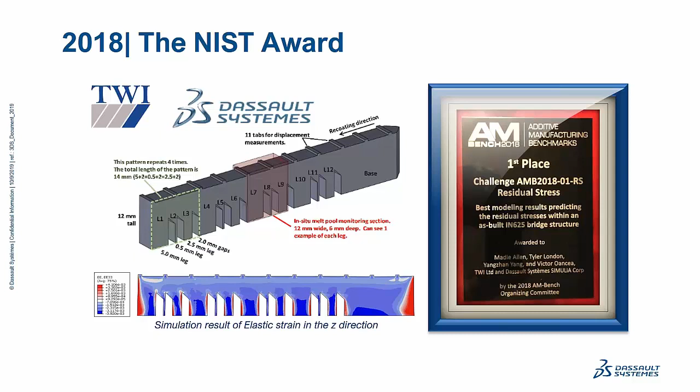But there's actually more in the pipeline, because in 2019 - that's one part of the whole additive manufacturing puzzle - we were also very proud to be the winning team in the 2019 Sandia Labs Challenge. This is what they term the Topology Optimization Roundtable Challenge. And basically the challenge was to use topology optimization in the design of a component for a Formula One race car, and whoever came up with the most effective design would be declared the winner.

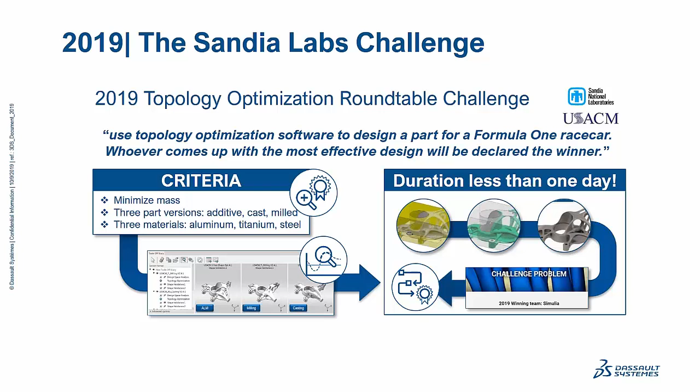Now this was based on a couple of criteria: you had to minimize the mass and make 3 different part versions - additive, cast, milled - and use 3 different materials, so aluminum, titanium, and steel. And basically, if we boil it down to a single thing, the fact that the duration using our solution was less than 1 day was, I would say, the chief convincing factor for the committee. So very happy to kick this off with 2 awards to the solution.

Now, it's always fun to talk about history. I did this in the last webinar when Stephen and I were talking about the eigenstrain method. I'm not going to dwell too long on this, but what I want to say is that we have been doing additive manufacturing for longer than a lot of people really think. Because this first started back in 2014 with the very first AM simulation that was based on Abaqus model change technology. And we honed this back and forth until in 2017, we released the first version of the end-to-end additive manufacturing solution, which we also refer to as Print to Perform, which you have probably noticed in both social media and our webinars earlier this year.

And what I would just like to say is that as of this year and moving forward, we are focusing on increasing the customization, because effectively you can say that every 3 or 4, maybe 5 months, there is a new additive manufacturing process coming out. And there's no way that anyone can keep up providing ready-to-go templates for these. It's simply not possible. So what we are doing is increasing the customization capabilities to be able to cover really any process. This is where we focus on simulation ecosystem integration, or in simple language, getting more input and getting even closer to our users who have started to adopt and are coming back with valuable feedback on what it is that we do for additive manufacturing.

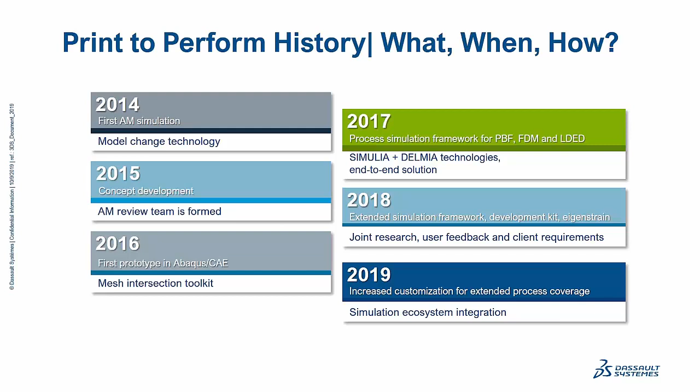So I did say that we have something which we call a fully fledged solution, and this is what we mean when we say full coverage. We actually speak about not just being able to go in and do a couple of local parts for additive manufacturing, but all the way from design up until the actual validation - let's say durability or a static fracture case - to actually putting a successful part out at the end of this chain. That's basically what we propose. And this is no dream, this is not a vision. It's just something we can offer with technology that's already been vetted, validated, battle-proven.

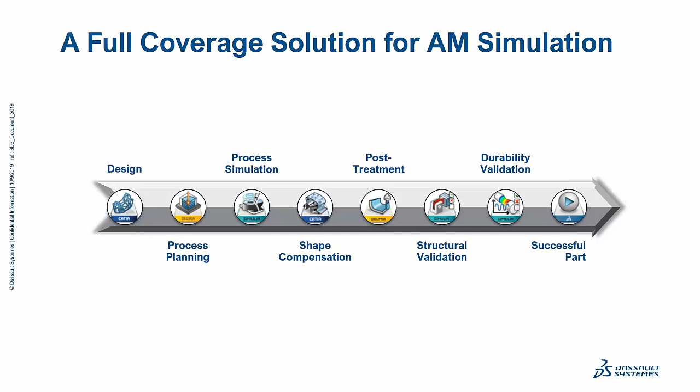If you have used any of our standalone or any of our legacy technologies in the past, you will know that this is nothing to be contested. But we're going to be talking about this more in detail, specifically on the thermomechanical bits, so I will simply move on to talking a little bit about challenges.

The fact is, when you want to go from having powder in your hand that is going into the 3D printing machine to actually getting working parts out in the end, there are two ends, or two players on a big field, you might say. There is essentially the team design and there's the team field. And design are basically those people who dream up all the new and interesting and organic and fun geometries, and they're being presented with a lot of challenges, which they solve in the best way possible with the tools available to them.

But the same goes for the people in the field who effectively have to more or less take the stuff that is being made for a test drive and tell the design team whether or not it actually works. Now, the classical way of doing this is by using the silo approach, you might say. And the problem is that getting something from a concept stage to an actual prototype is a process of going from weeks to months. It can take a tremendously long time because we're shifting information in a very inefficient way.

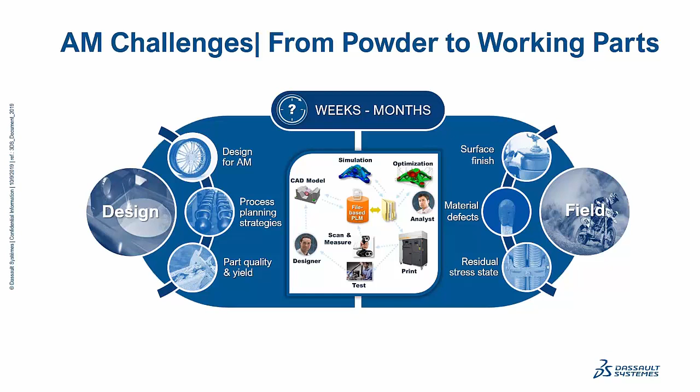So the question is really, if we want to reduce this, and that's what we have to do because it's an old technique, additive manufacturing, but it's a novel piece of technology. We want to change this so that we're not talking weeks to months, but rather days to weeks. When you say, okay, that's a good idea, generally this is the situation you're going to be faced with: a lot of concerned, frustrated, and simply confused faces in your workforce. So the question is, how do you bring the skepticism or the discrepancies of these two teams together and make it dynamic, make it completely collaborative?

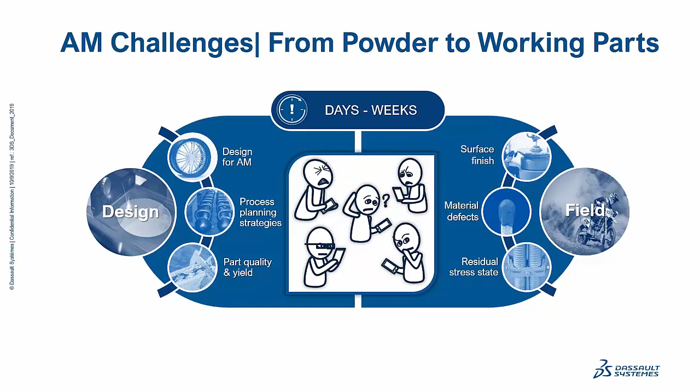This is where we bring in what we call the end-to-end solution for additive manufacturing simulation. And effectively, this is based on 4 different components or 4 different pillars. It begins with the so-called function-driven generative designer. You will see some bits of that today, but not much because our focus is on a different topic. The second part is where you go through the step of actually preparing whatever it is that is supposed to be built in the additive manufacturing programmer step. The third, and that's where we're going to be focusing our activity today, is the additive manufacturing researcher, which goes into deep simulation, tries to deeply and in a very detailed fashion understand exactly what goes on in the printing process.

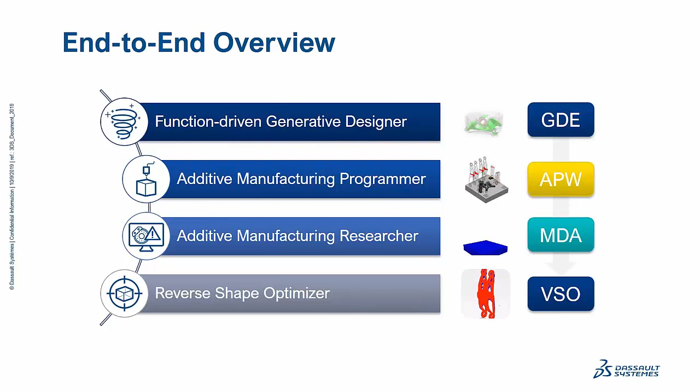And to close everything off, well, you can consider it a small component, but it is certainly not an irrelevant component, and that's the reverse shape optimizer. This is the tool that can be used to close the gap between the as designed and the as built component. So it's absolutely crucial. We will touch upon it in a little bit, but not in detail. So with fair warning in place, I would like to proceed to the next section, which is simply to talk a little bit about the print to perform features.

Now, I have deliberately gone through the introduction a little bit quickly. If you have any questions about it, please save them until the end. And I'm now going to pass on to Stephen, who is going to take you through a couple of steps and then go into exquisite detail.

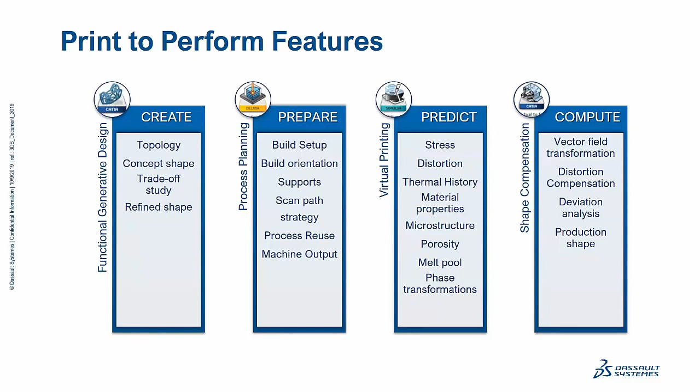Let's have a look at some of the details we've been talking about. So, of the 4 pillars we talked about, the first is the design pillar, and that's something that I would almost call a known concept, the role in which you have the functional generative designer, which allows you to design parts in a new and novel way. It's commonly called bionic design, or the technology is topology optimization, which will give us designs which may or may not be printable using additive manufacturing. And at this stage, we have the design created as we have it here.

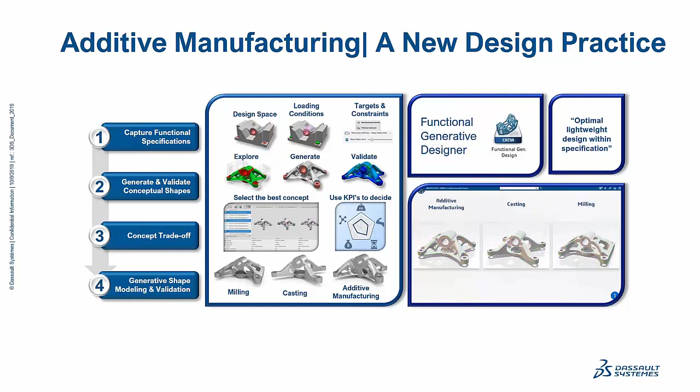So the next step would be to look at manufacturing the product. So we're staying in the same environment, now shifting the app to the process planning, preparation. The design exists, and now we are looking at things like arranging the parts in the build tray where they should be, deciding which machine to use for printing, and since we are using a laser additive process here, we decide which kind of scan path, what laser power, what laser path we want to use. That is part of the process planning and preparation.

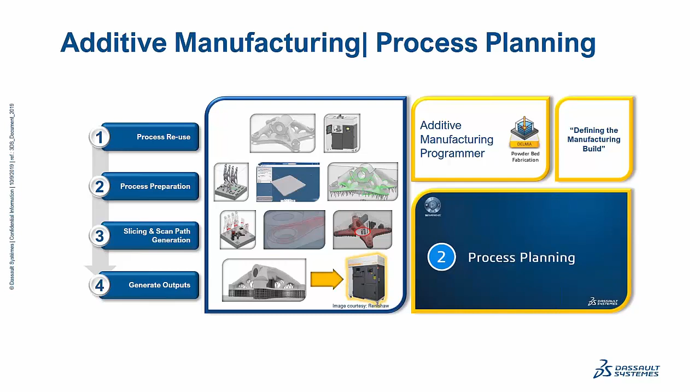With the information in place, with the support structures generated and everything, we are ready to print the part, or, and that's something that I think is very important, to simulate printing of the machine. So the concept that we're using here is pretty much similar to the paper printer you may have in your office. When you buy a new printer to print your reports, you normally run a setup configuration on your computer so that your computer knows how to talk to the printer. You run a printer installation from disk or a floppy back in the days, whatever. And the same concept applies to what we call the virtual machine.

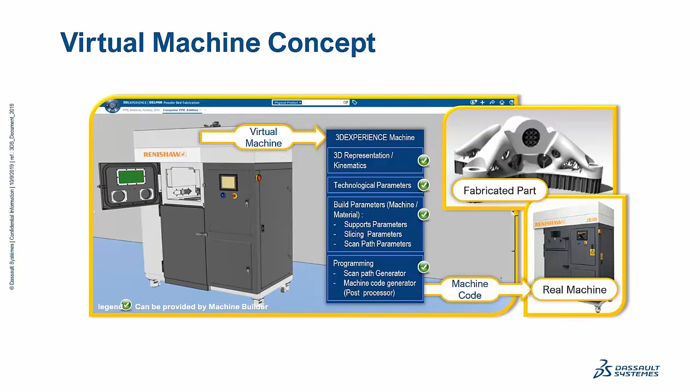So within our software, we have a virtual representation of your physical printer, like this Renishaw machine shown here as an example, with all the kinematics, the technology parameters, the build parameters that are available in the machine, and you're able to program that machine online using our software and send that information in machine code right to your physical printer. And I think that's the important thing when we talk about digital continuity, we use exactly the same information to actually print the part in the simulation. So for example, shown here, for a rather complicated structure like this lattice, we generate the print path, the laser scan path, and we use that information as an input for our thermomechanical simulation.

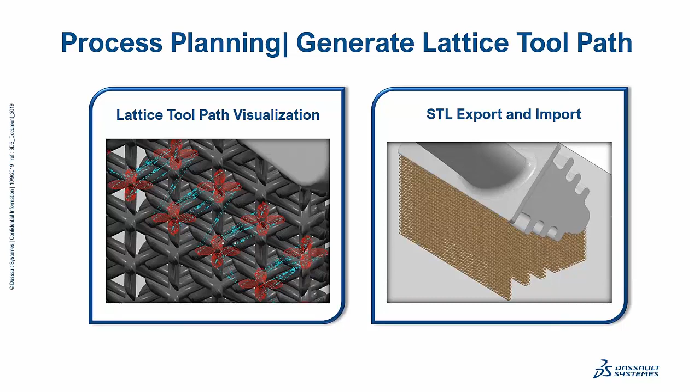So let's have a look at this simulation. That's the virtual printing process that we're looking at here. So in this virtual printing process, what we want to do is incorporate the information from the print setup. We have the geometry, we know the material data, thermomechanical material data that is, of course. And what we do is a two-stage simulation. The first stage is the pure thermal simulation. We take into account the laser path that we just derived, put that information in our simulation, and see how the temperature field evolves over time. With this information, we can run the structural simulation, which will give us predictive information about the possible part deformation, about stresses, and things maybe not going as we want them to in the print process.

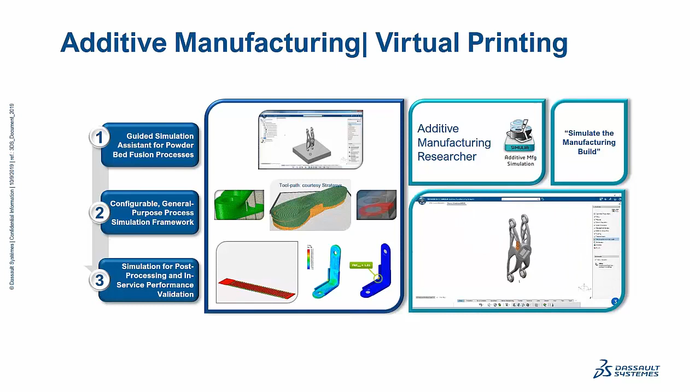How does that work? At this point, I want to go into some of the technology details that we have created, making the whole simulation possible. Oftentimes, when we present our thermomechanical approach, we are met with skepticism. People tell us, oh, this is going to take light years, or ages, or eons. It's technically impossible because they assume we are forced to use elements at a micrometer level size and simulations that take forever. Now, we wouldn't present our technology if that was the case, if it would take all the computers that we have available on Earth. So we have two tools that allow us to do this thermomechanical simulation in very competitive time, giving very good results, as Anders already said, with the examples from the NIST award and the other awards that we got for this simulation.

The first thing that we have here is the Mesh Intersection Toolkit. This Mesh Intersection Toolkit allows us to map the information that we have gathered in the process data, such as the event series for space and time, showing us the position and the path of the laser during the simulation, and map that onto a real-sized mesh, allowing us to run real-sized parts. So we're not into extremely fine, extremely small meshes for part-level analysis. We have different ways of describing these events that happen in time and space. That includes things like the power rating for the laser, one laser, multiple lasers, mass flow rates for deposition processes, recoating processes, meaning activating elements, build changes, adding or removing elements, and so on. And this tool allows us to do this kind of simulation in reasonable time.

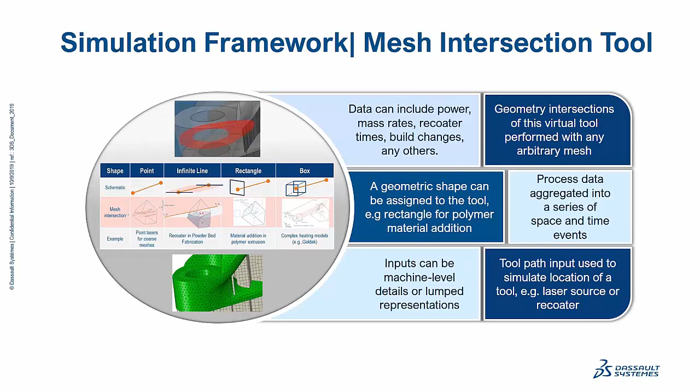The second pillar that we have for this kind of processes is the progressive element activation. So when you think about adding elements to a simulation model, or maybe removing elements at a later stage, let's look at adding elements. The common perceived process is that we add one element or more elements at a time in multiple steps in the analysis, forcing us to have hundreds, thousands, or maybe millions of analysis steps and adding elements one by one. That indeed is a costly procedure, and no, that is not the way we're doing things, because it would be too costly.

We have a technology called progressive element activation that we're utilizing here. So we are activating full-size elements, regular-sized elements, whatever size you feel comfortable with, and we're only activating that portion of the element that corresponds to the current print height. Everything else in this element is not active, it's not taking part in the simulation, and it's not wasting our time and resources.

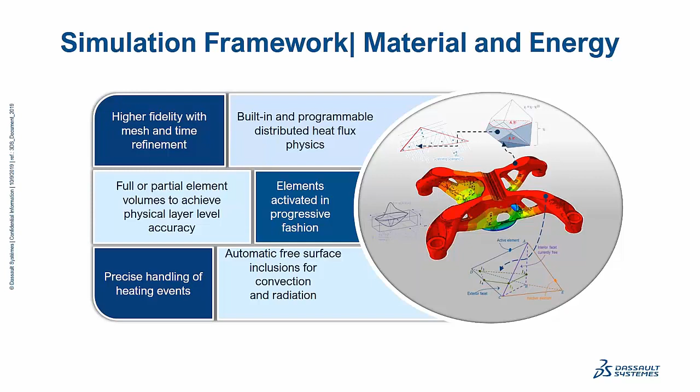There are other technologies. I'm just showing this as a glimpse of what is available. We do have and offer the eigenstrain or inherent strain method, which is a purely mechanical analysis disregarding thermal effects. But today, we want to look at the thermomechanical simulation and see some of the features that are only available in the thermomechanical approach.

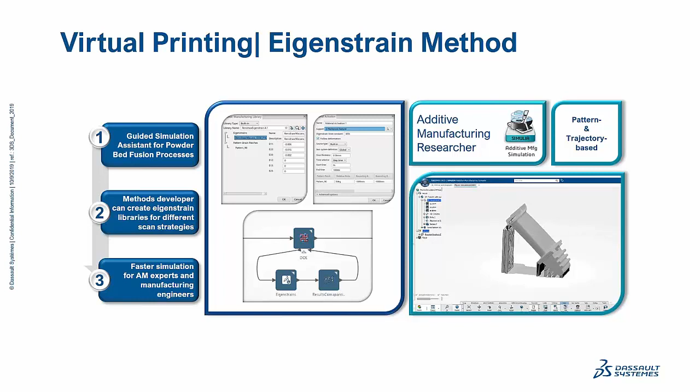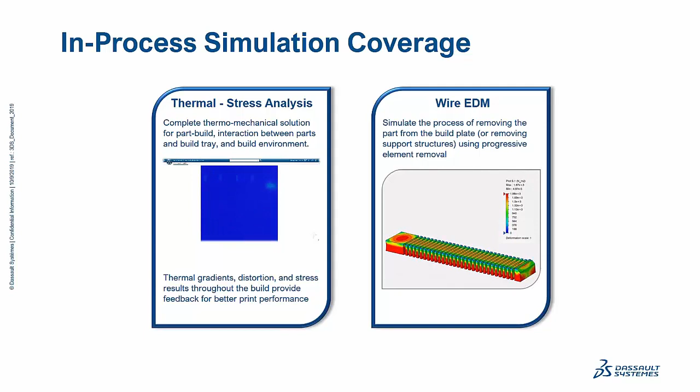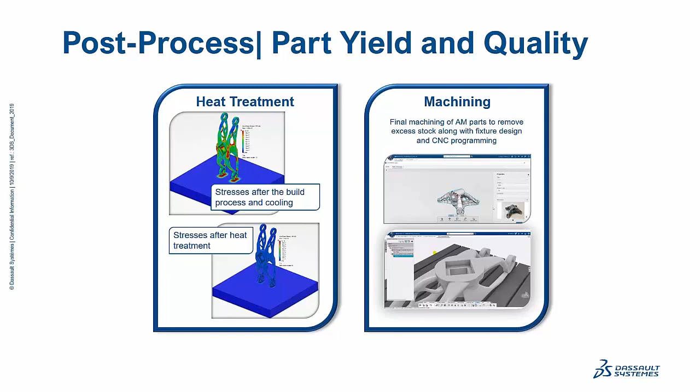On the same level, this is for post-processing, is of course the machining operation that we can do on the part. Oftentimes we will modify the geometry slightly to make it printable, and we need to do a post-processing operation. That post-processing operation can be quite expensive, and it is advisable to simulate that beforehand to see whether the fancy support structures that we just generated are actually in a position where we can remove them from the part without destroying it.

In-service loading. We're talking about print to perform. Print to perform as in we're not happy with just being able to simulate the print process. That's not what we want to do. Simulating the print process in essence is nothing more than the birth of the part. Maybe more complicated, maybe a cesarean section as compared to simply milling a part, but just simulating the print is not enough. We want to talk about print to perform. We want to see how that part that we just printed performs in service loading.

And the residual stress distribution depends heavily on the positioning of the parts on the build tray. It depends on the use of the support structures, the temperature management, and things like the laser path, because that affects the stress field. And the stress field in turn affects the service life of our part. So it's things like that we need to take into consideration and we want to make visible for you as an engineer when evaluating the part and the performance of your structural part.

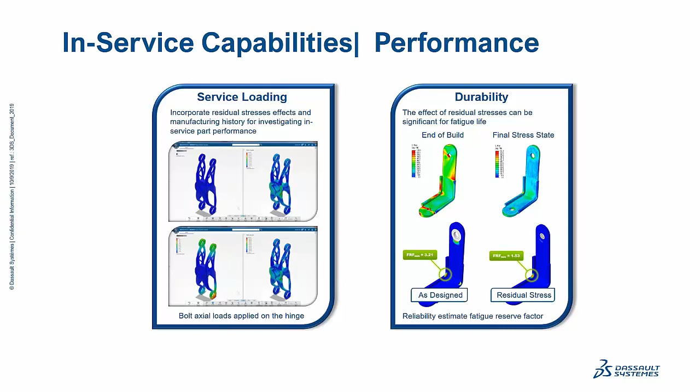Maybe we want to be in a position where we want to optimize the temperature field, where we want to optimize the operation of the laser. There are techniques to operate lasers in such a way that we reduce residual stresses, and that of course requires us to be able to do such a simulation.

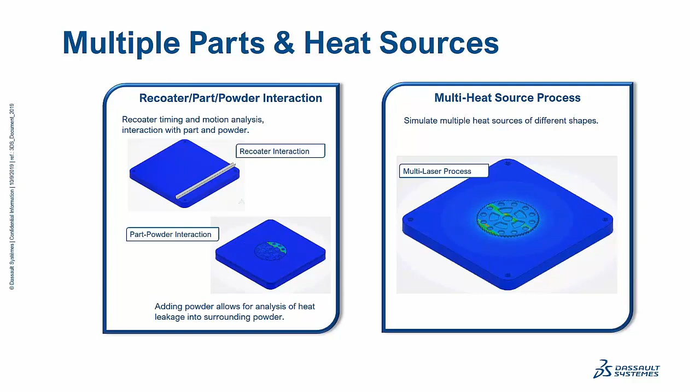It's not something that is interesting for us afterwards, where we simply say, oh, it's red here, something could have cracked. What we see instead is the part cracking during the print process, and that in turn affects, of course, the temperature distribution, because at this point, the support structures, which serve not only to hold the part in place, but also for the thermal management, don't really do what they're supposed to do.

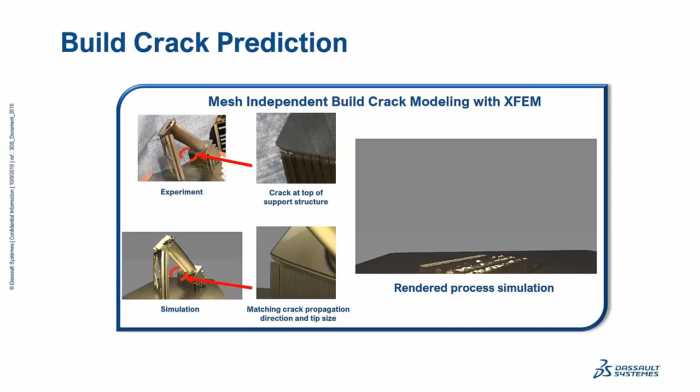Now, for some reason, this animation stopped and refuses to start. Okay, so it wants us to take the next slide.

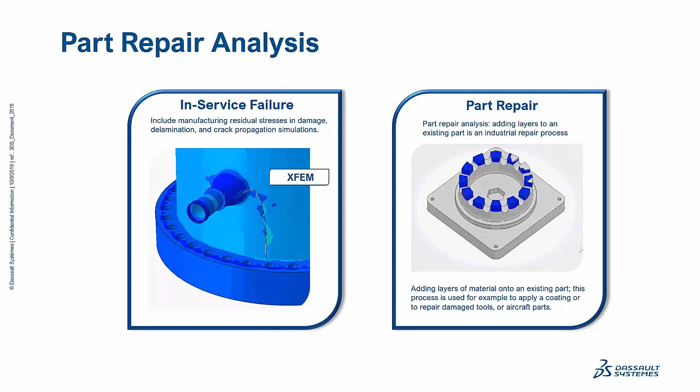We talk about print to perform, and performance even affects the part after the print process. What we see here in this example is an in-service failure where the part cracks after the print process in a service situation. And again, it is highly dependent on the existing residual stresses in the structure. On the right-hand side, we can see a repair simulation. The colors here represent the temperature field. Again, this is only possible in thermomechanical analysis.

So we assume we have a part, a milling head or an aircraft part, that has been damaged. We remove part of the structure in a previous milling process, cut it down to a base, and then we're adding new regions to the structure. And in this kind of process, it's interesting to see how the existing base part is affected by adding more to the structure, to see whether it maybe deforms beyond acceptable limits. And that too is a highly temperature-driven process.

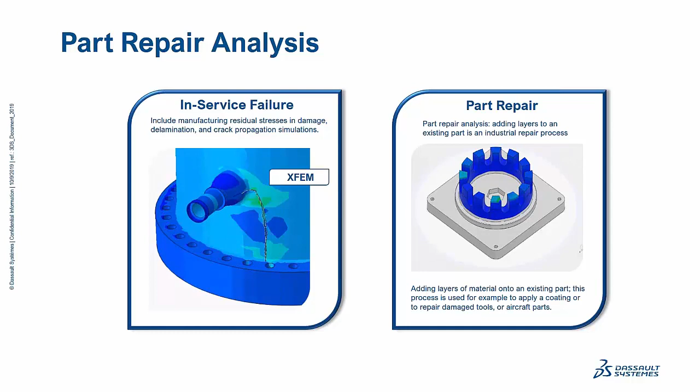With a reasonable number of elements, the simulation scales. Large computers can take, of course, more elements. And in thermal analysis and in the structural analysis, we're taking these detailed structures into account, allowing us to see what happens in detail here.

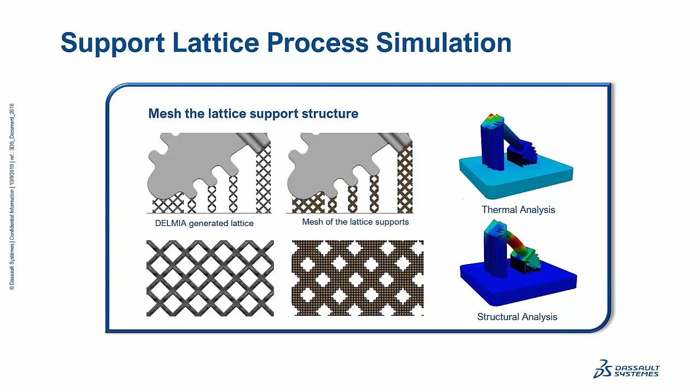Sensors and process control is a very important subject. And what we want to highlight at this point is many of the machines that you buy today have sensors incorporated that may provide feedback to the print process. In our simulation, we can monitor that. So in the same way as you're monitoring your real-world machine, we can monitor the process in our simulation,

And we can actually use this sensor output in the simulation moving forward. So in the same way as the real-world machine can adapt its process to changing conditions in the build chamber, we can adjust our simulation the same way, allowing us to simulate the process beforehand to see what would happen if we change the laser power at a certain position of the part during the process, or maybe other things, to see whether we can improve the part quality during the build. And again, this is a highly temperature-dependent process, so that's why we do thermomechanical analysis.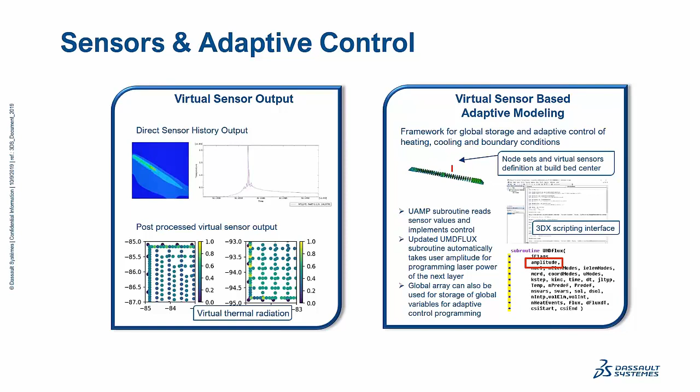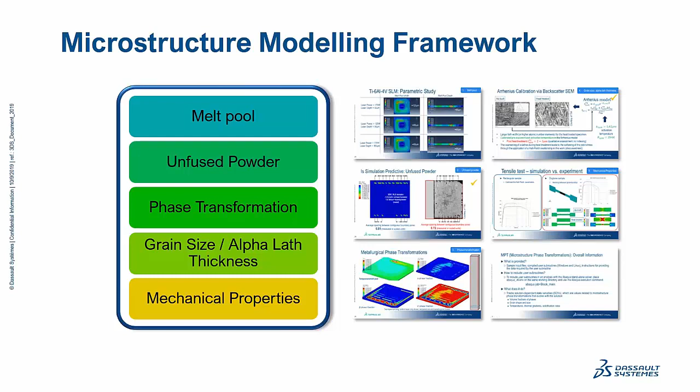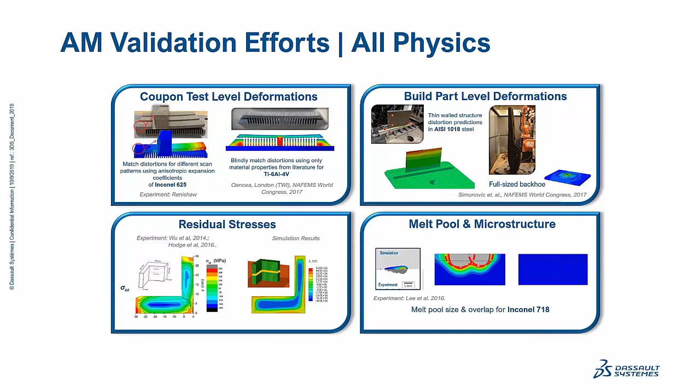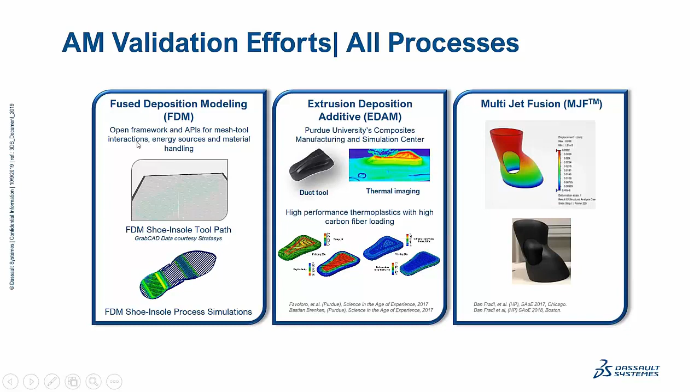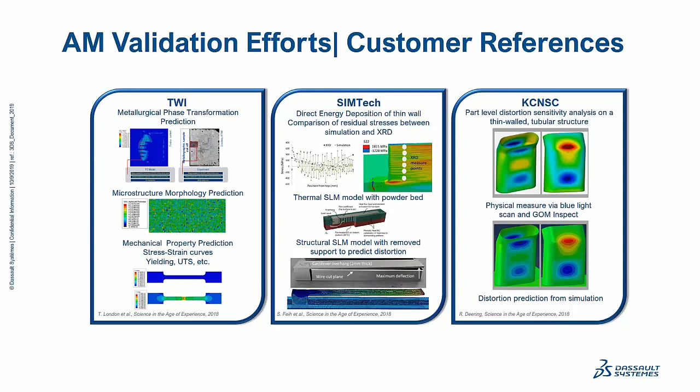I think in order to kind of combine and have a summary of that, I'll hand over again to Anders, who will talk about the validation efforts in general. Yeah, thank you, Stephen. Well done to you for compressing all of that detail and not rushing it into that short span of time. It's something, obviously, if we wanted to talk about this, we could do a whole webinar only on the validation efforts. But our time is unfortunately not of infinite quantity, so we're still pretty happy with this and hope you've enjoyed what you've seen too.

But I think personally, from a perspective of experimental mechanics, probably the most impressive features are the fact that we've been able to validate quantities such as temperature, distortion, microstructure, and I think above all mechanical properties. Getting that link between what is being built, as in the phases, how they ensue in the actual material, and linking that back to the mechanical properties is a feat on its own.

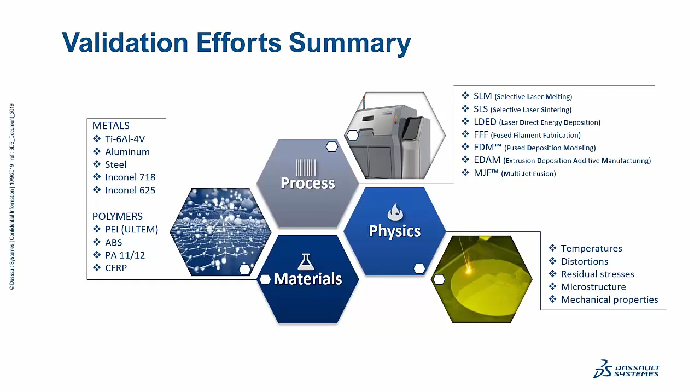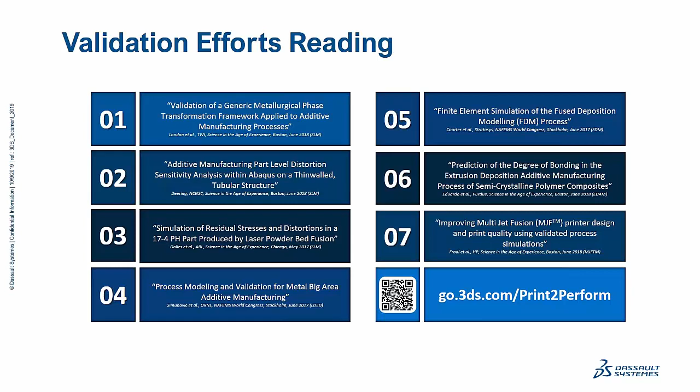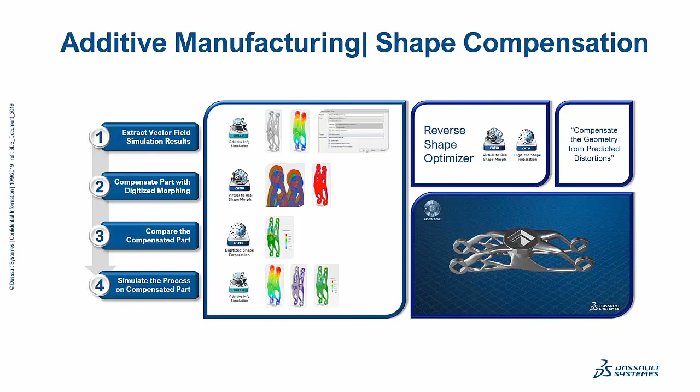Now I need to close the loop a little, because we initially mentioned shape compensation, and I'll briefly explain what it is. This is super old technology, in practical use since the 60s and 70s, but perhaps not in this fashion. Effectively, it builds on the thermomechanical simulation, which gives you a vector field of deformations that you extract and use to compensate your part with something called digitized morphing. Then you compare the compensated part with the original to see where the differences are, and go back and simulate the process on the compensated part for a final comparison, to see if the as-designed component will look like the as-built component. That's the strength of this tiny piece of the puzzle.

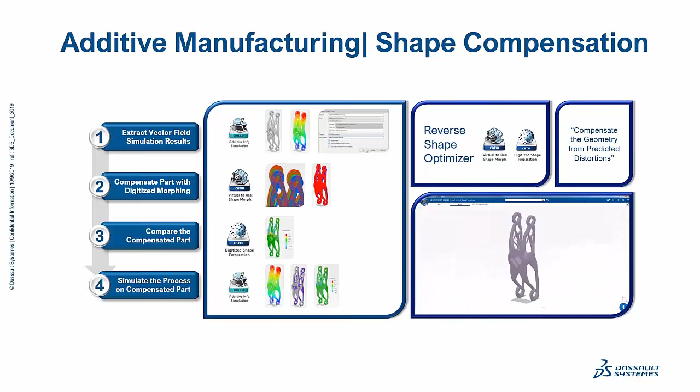To summarize, I'll take one final excursion since we've more or less unfolded the extent of our thermomechanical solution capabilities. Effectively, our strategy is a truly full coverage digital thread, native throughout the 3D Experience platform. We haven't talked about the platform at length because it's self-evident that it's the foundation for proper collaborative work. If you want to picture the additive manufacturing solution as a subway network, that's actually not a bad analogy, because there are many ways to go from input to final component, and you're not limited to one line. There are many different extensions, routes, and inputs, various places to start your journey, and above all, there's learning content for all of this.

When you put all this technology together, we bring it through individual applications that are model-based, data-driven, and above all backed by science. It's all to enable you to make parts that work in the end and have your boss be happy with what you do. Of course everybody wants that—it's good for the yearly bonus.